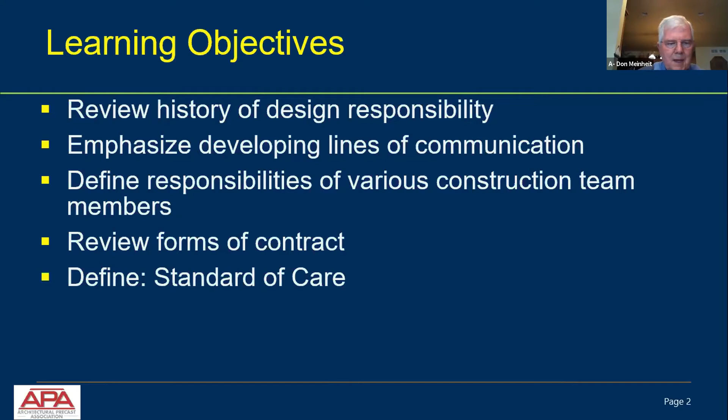Just briefly, here are some learning objectives for this discussion. The most important is the third bullet, where the ACI document defines the responsibilities of various parties in the construction of architectural precast concrete. Before getting to that bullet, I would like to also review and describe some history of the design responsibility requirements, emphasize that in every project, we need to develop lines of communication. We'll then get into the responsibilities of various construction team members and review forms of contract. And also in this presentation, I will define a standard of care.

This is a list of the ACI 533 members who were part of the group who voted and produced this particular document. The ACI 533 committee is called Precast Panels. It not only includes architectural precast, but also structural precast panels. The chair is David Wan of Oldcastle Precast. The secretary was Karen Polanco from Metromont. Karen is also now the existing chair. David has retired from the chair.

And there are several members that maybe you recognize names in this list. One might be George Beatty from Crescent Chemicals. Harry Chambers, unfortunately, is deceased, but he was a longtime member of ACI 533 and worked for TRW Nelson Stud Welding. Brian Miller has long been associated with precast concrete. I believe he started working for the National Precast Concrete Association, moved to the Precast/Prestressed Concrete Institute, and now works for GCP, a materials supplier.

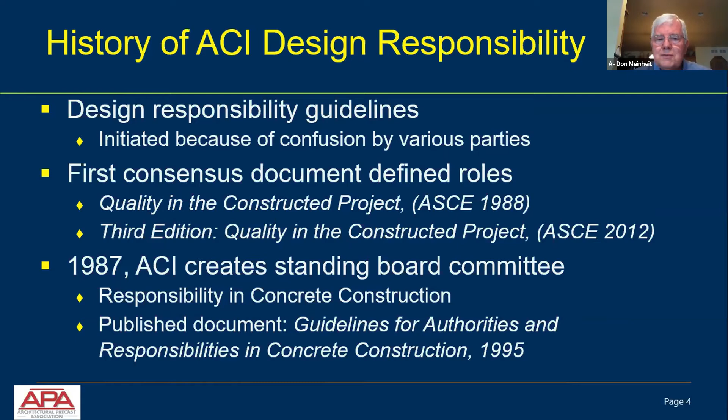They first published a document called Quality in the Constructed Project in 1988. That document is now in its third edition and was most recently revised in 2012. In 1987, ACI created a standing committee at the board level called Responsibility in Concrete Construction. And they first published some guidelines for authorities and responsibilities in concrete construction in 1995. And it was the action that ACI took that provided ACI 533 the initiative to produce a document.

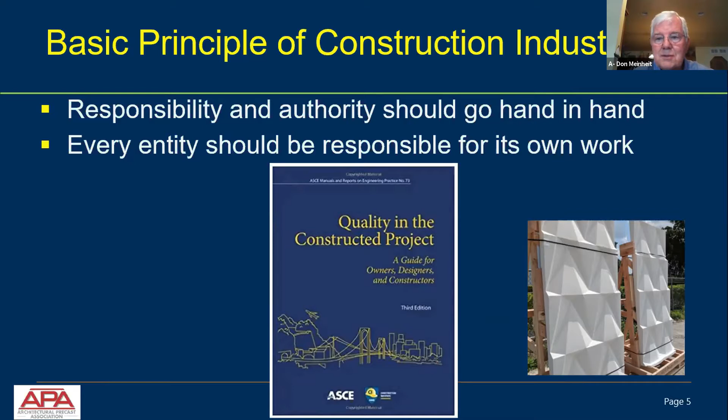And this whole issue of responsibility breaks down into two basic principles. The first principle is responsibility and authority should go hand in hand, and every entity in a construction project should be responsible for their own work. Kind of makes sense. In the middle of this is also the third edition of Quality in the Constructed Project produced by ASCE.

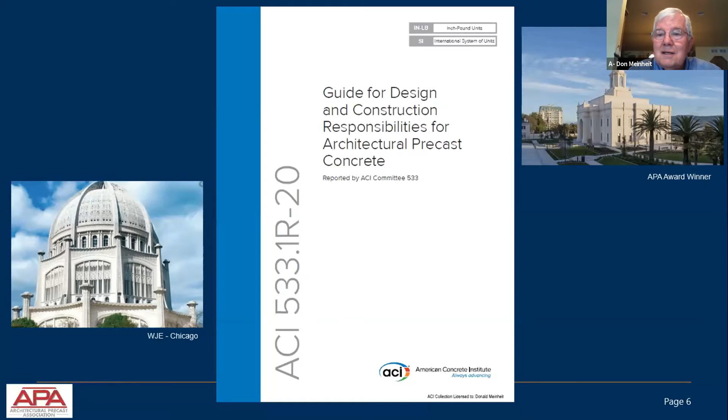This is also the cover sheet of the 533.1R-20, the guide for design and construction responsibilities of architectural precast concrete, published by the American Concrete Institute. And it is, as Tim said, sent to all of your certified APA plants. It's 11 pages long, and I've added two pictures. One on the left is kind of a historic, older precast concrete project. This is the Baha'i Temple here in the Chicago area. And the one on the upper right is a church in Chile, which is an APA award winner.

Now the ACI 533.1R, this design and construction responsibilities document, was first published in 2002. In this revision to the 2002 document, we have improved and added some additional information. The reason the 2002 document is no longer around is that ACI requires all of its committees to reapprove, update, or revise, or in some cases withdraw documents within an 8-year period.

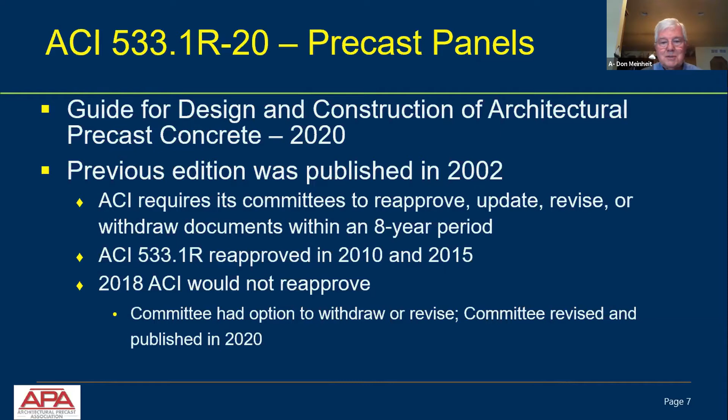ACI Committee 533 elected at the end of that 8-year period, which is 2010, to reapprove it. But ACI says you're not going to reapprove it forever, so you got 5 years of grace, and then you need to decide what you're going to do. So in 2018, we had another option, and that was that ACI said you got 3 years to revise this, or it comes off of the ACI's publication list. So we met that deadline, and so in 2020, we republished this document, and it is now available.

Now, I think everybody understands modern construction projects are very complex. And it is very logical to have input from all the parties of the project. And that's an absolute necessity. There's no one entity that knows everything about the construction. So inputs such as value engineering proposals, design alternatives, and performance requirements rather than prescriptive requirements are all good inputs for a construction project to make it acceptable to the owner who's paying the bills, as well as keeping the cost within the budget.

So let me play with this just a minute. Suppose we have an architect engineer saying that they require a contractor not to undertake certain tasks without the approval of the architect or engineer. And then suppose a problem develops from execution of those tasks, but the AE says they're not going to accept responsibility for those problems. Well, that's a conflict. That's a case of requiring compliance, but without accepting the responsibility.

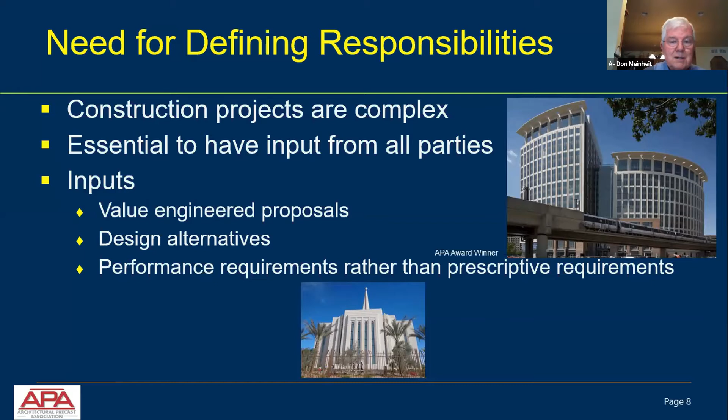Another scenario might be where owners have sued the architect and the engineers for approving poor quality construction, but at the same time didn't give the architect or the engineer a contract to monitor work progress. Here the owner is assigning responsibility without providing compensation for giving the architect and engineer any kind of inspection authority.

Project success seems obvious, but it's worth repeating. Clearly define the scope of the work. It starts with the architect, but it also needs to be clearly defined and understood by everybody in the project team such that the architect's concepts are manifested.

Also, clearly defined responsibilities are necessary, and those responsibilities are both in scope and in execution, such that we can achieve efficiency and cost. The project is cost effective. It is by all means safe to construct, and the structural engineer and other parties have designed the structure to be safe for the loadings, but during construction, it is also necessary that the work environment be safe, as well as producing a high quality product.

There are 5 basic chapters to this design and construction responsibility document. There's an introduction and scope. There's a section on definitions, which is new to the 2020 document. The 3rd chapter is called general responsibilities, and that's what we'll talk about more in detail, but that defines the responsibilities of the various parties in the construction project. Then there's some guidelines on hardware responsibilities, and lastly there's procurement and the bid process and how we go about getting the structure built.

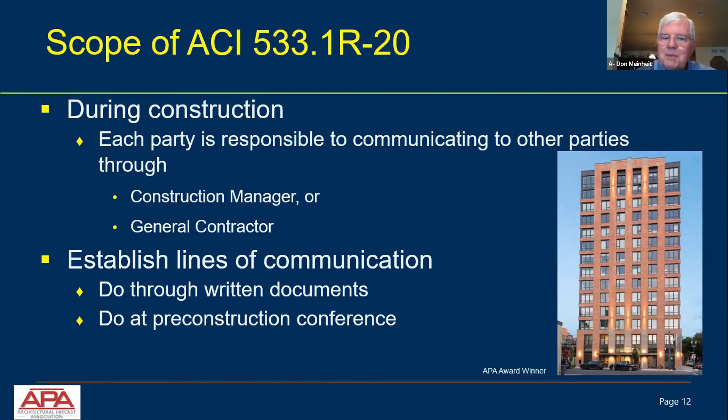During construction, each of these parties is responsible to communicate with the other parties. And that's usually through one of these two groups. It's either a construction manager or the general contractor. There is a necessity to have those lines of communication. And the CM or GC can do this either through written documents, or he can specify them during a pre-construction conference.

So in the design of precast concrete, more often than not, it is designed and reviewed after the precast work is under contract. It's not often that a precaster has to provide structural calculations and drawings that show how the precast fits on the structure prior to construction. It's usually done after the precast work is under contract.

However, if the architectural precast erection drawings are needed for the permit set, and that might be necessary depending upon how the project is submitted to the local building officials, that might require a seal of the precast specialty engineer prior to everything being under contract. So there may be some requirements for the architectural precast erection drawings being needed well before they are ever executed.

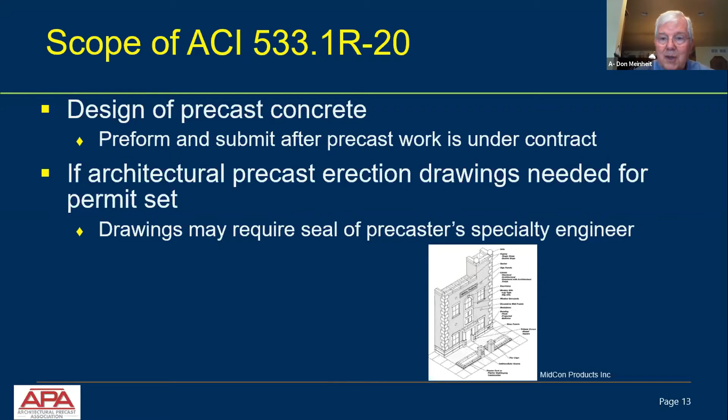Now, I said something about the standard of care. This is the definition that we got out of the ACI dictionary, and it's the one that we used. I'm sure that if you go to a lawyer, you'll get another one. I can recommend a colleague of mine at WJE who can give you an hour and 15 minutes on the standard of care. But fundamentally, this is the definition that we use.

It's the level of skill and competence ordinarily and contemporaneously demonstrated by professionals of the same discipline, practicing in the same locale and faced with the same or similar facts and circumstances. The long and short of that is, I, as a structural engineer, am oftentimes asked to review other structural documents and calculations and plans. The standard of care is, did the person do it with all of the correct load path? Did he do it with the correct load factors and things like that?

I may not have selected the exact construction that the other individual is suggesting, but if they can demonstrate to me that they can do a safe design, that to me represents a standard of care.

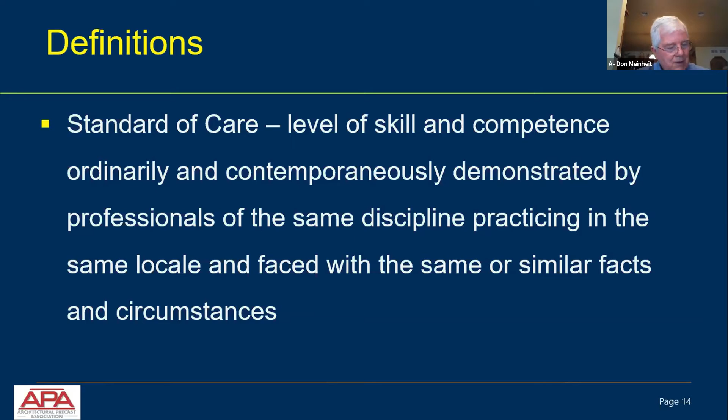Now, our first person who has responsibility is the owner, and the owner's project requirements and responsibilities include establishing overall goals. He has to also express an opinion on the type of building, whether it's concrete, steel, precast concrete, or even wood construction. He has to specify the intended use. What is the building supposed to be used for? Is it an office? Is it residential? Is it a warehouse? Is it supposed to be multifunctional? Is it supposed to be able to be converted from one use to another? That necessarily comes from the owner.

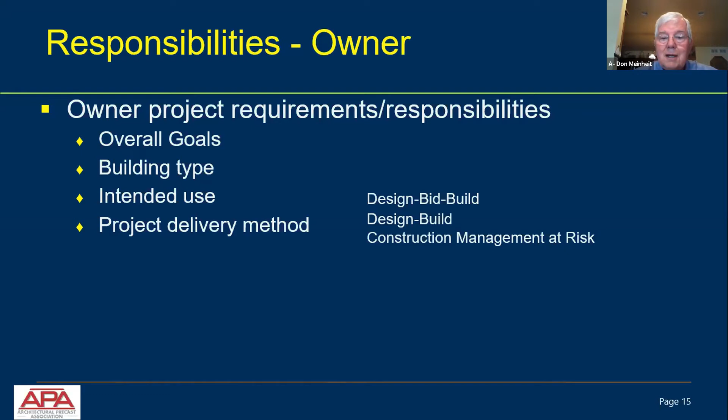There's also a project delivery method, and that is to some extent up to the owner. Certainly, there is the design-bid-build option, which is very typical of most construction. There's also a design-build option. And we can also do this with a construction management at risk or a construction management multi-prime approach. So the delivery approach needs to be defined early by the owner working with his team, more often the architect, and if the owner already has a desired builder, with the builder.

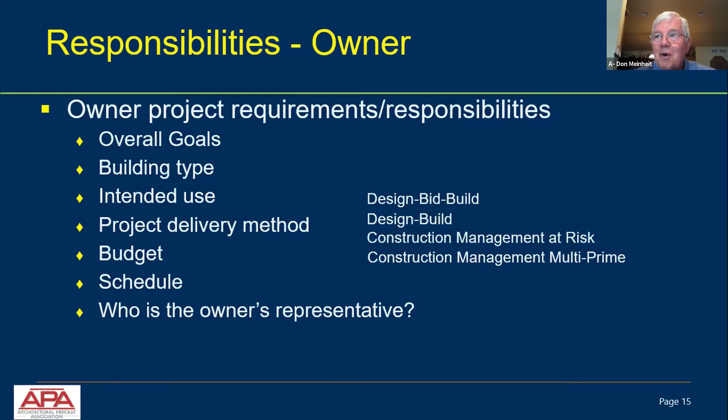So the architect has a lot of responsibilities, including those associated with the contract documents. Those contract documents develop the project concept. If the architect's drawings don't develop that concept, the rest of the team begins wandering around, wondering what they need to do. Those documents need to establish overall structural geometry, select the materials, appearance and function. They should specify tolerances and quality characteristics, and provide some details, not all the minute details, but what the joints might look like between elements.

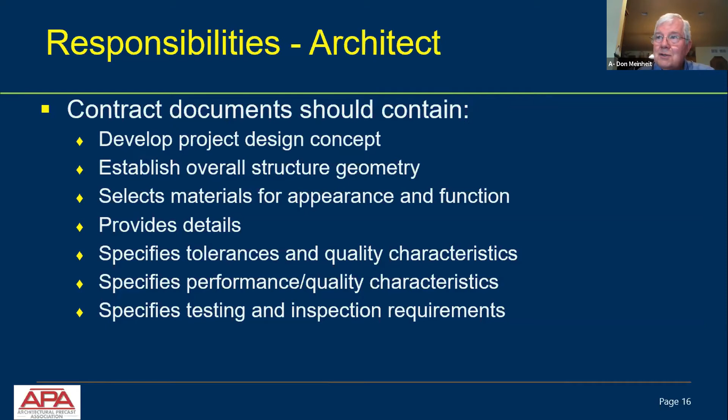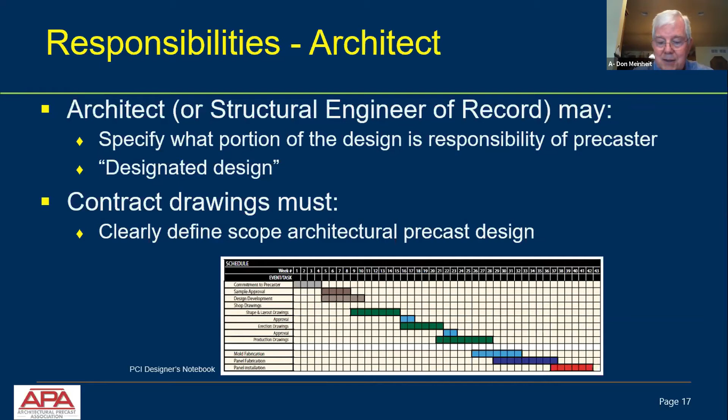Those architect documents should specify performance or quality characteristics, and should not neglect testing and inspection requirements. The architect or the structural engineer of record may be specifying what portion of the design is the responsibility of the precaster. The structural engineer of record usually designs the building frame, but is not necessarily involved with the detailing design of the architectural precast. That is called a designated design, and the precaster is responsible for it. Those contract drawings must define the scope of the architectural precast design before any precast design is undertaken.

Architectural drawings should show where the reveals are, primarily where the reveals are. However, it really should be the precaster's decision on panel size, because the precaster understands and knows how to handle, how to erect, and how to make the connections to the building.

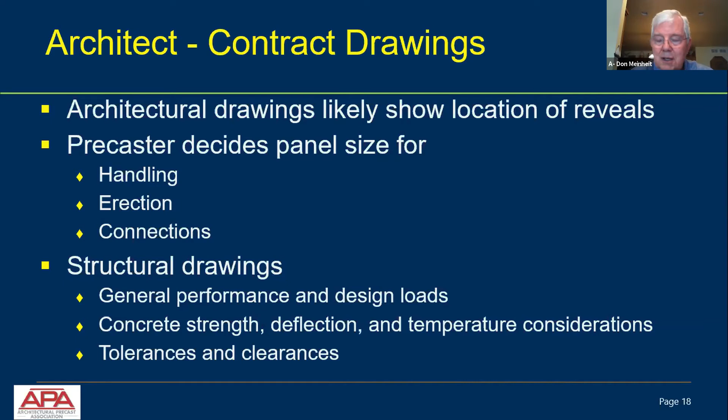The structural drawings should identify the general performance and also the design loads, and make sure that the structural drawings have the design loads for the precast panels that are being attached to them. They will usually define strength, deflections, and temperature considerations, and also either in the structural specifications or in the architectural specifications, the project manual, tolerances and clearances should be reviewed and identified.

So for a drawing summary, the architect should have both building location and site access shown on one of the cover sheets. It should show elevations, wall sections, dimensions. It should show basic details of joining and interfacing with windows, roofing, panel to panel sealing for air and moisture. And also locate the reveals.

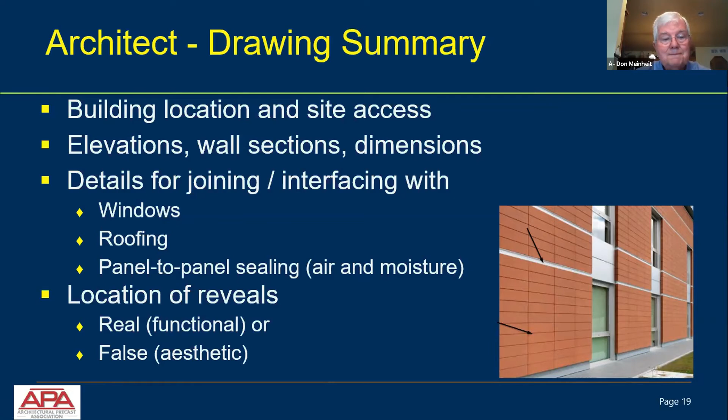In some cases, those reveals are real, like along this edge here. In some cases, they're false, like along these two lines in this architectural precast panel made to look like terracotta. The additional thing that must be shown on the drawings from the architect are what the required materials are and the color and finish. That's the architect's job, is to select those out of some kind of a palette.

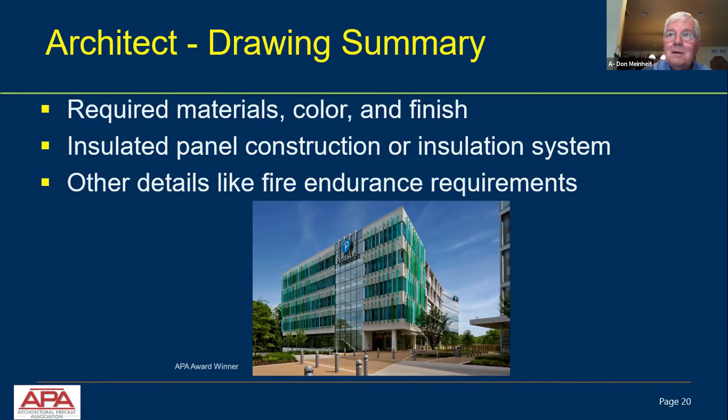Dimensional tolerances are, of course, a primary concern, and the recommendation from this committee from ACI is don't screw around with the industry recommendations. The industry recommendations, from my knowledge, are identified in PCI Manual 117. It's called the Manual for Quality Control for Plants and Production of Architectural Precast Concrete Products. There's also another document, the Tolerance Manual for Precast and Pre-Stressed Concrete Construction, MNL 135. MNL 135 is more attuned to structural precast as opposed to the 117 manual, which is architectural precast.

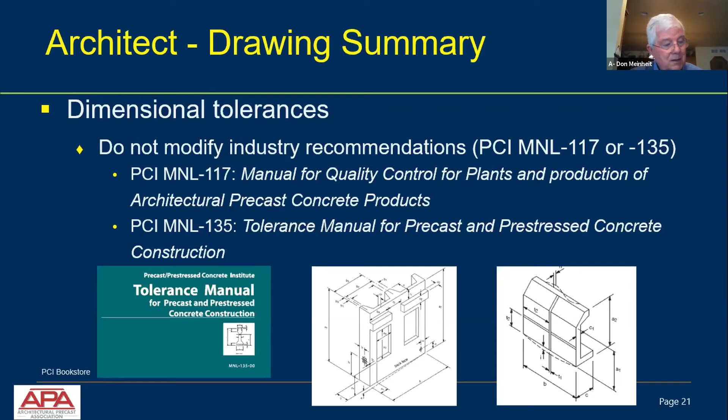And again, don't let anybody fool around with these tolerances. The industry knows what they can do, and these documents are available. I don't believe I saw any tolerance recommendations on the APA website, nor did I find one on the NPCA website. So my point of reference here is that PCI has a very good manual on tolerances.

When the architectural precast is finished, the architect and the structural engineer should be reviewing these shop drawings for conformance, and that's a conformance to the design criteria. Do they conform to what was on the architect's and the structural engineers' drawings? Did they meet the load requirements? Are the connection points reasonable and appropriate for loading the structure with this externally applied load?

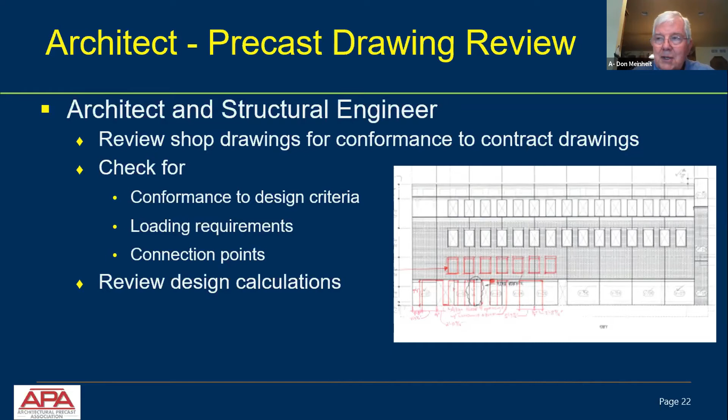In addition to that, the precaster is more often than not obligated to submit design calculations for the architectural precast for review by the structural engineer, and those calculations need to be approved really before the precaster begins his fabrication process.

The procedure that is found to be most successful is that there is a need to have an architectural mock-up sample. And approval typically requires an approval of a mock-up. The mock-up should really include things like the returns and the special features. Sometimes a full-scale mock-up is necessary, but without doubt, some color range and texture mock-ups are important for the precaster to make. And it usually produces at least 3 range samples.

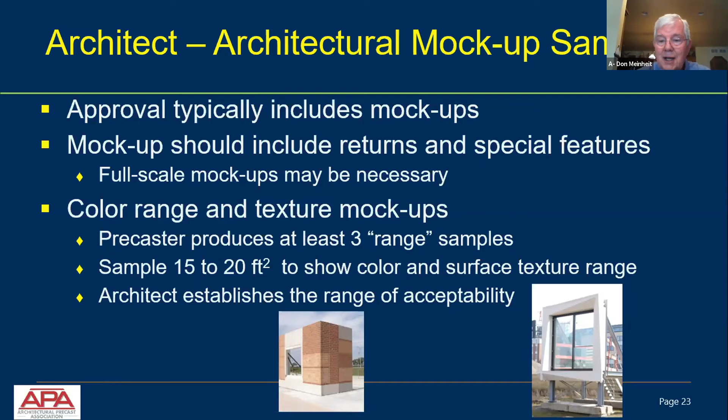In other words, these are ranges of the color as well as texture, and these samples are anywhere from 15 to 20 square feet, so it's like a 4x4 piece, so that they show both color and surface texture. And then the architect establishes what range of acceptability he's content with. And then the precaster has to meet those acceptable ranges.

The architect oftentimes has some detailed testing requirements, and this is particularly important when you need to evaluate the panel water tightness as well as the joint water tightness. Panel water tightness for concrete is pretty easy to do unless you have a whole bunch of cracks, but the joint water tightness is something that really needs to be tested, and a full-size mock-up is probably the best way to assure that we get water tightness.

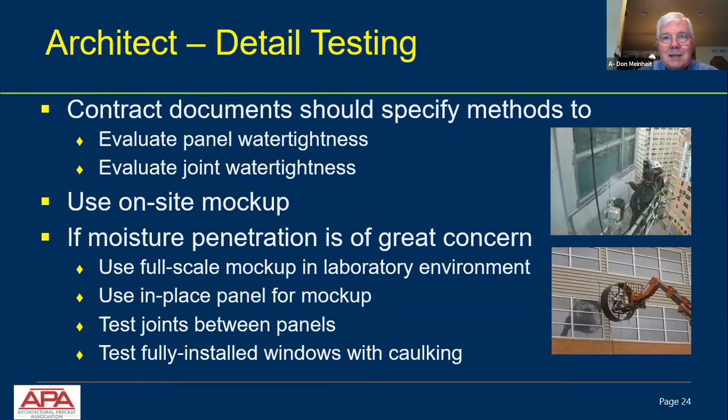You can either do that in a laboratory environment, or you can have an in-place panel on the building, and we use that for a mock-up to test the joints between panels as well as the junctions of windows and doors and things like that make penetrations with the architectural precast.

In terms of panel inspections, it's suggested that the structural engineer or architect create a checklist to verify conformance with those key items in the contract documents. And then it doesn't make any difference if you do the checklist unless you meet with all the parties involved to address the inspection concerns. And once you have those inspection concerns, the precaster must do some repairs as required to meet the architect's aesthetic requirements. That means that not only the panel, but the repair needs to fit in the color range and texture for the range samples.

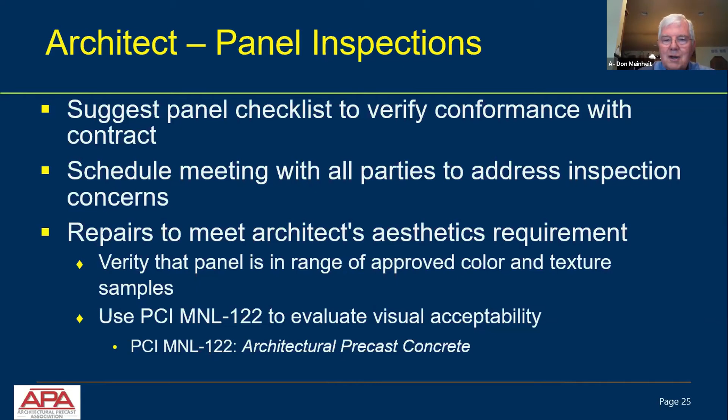And also there is another PCI document to evaluate visual acceptability. That's PCI Manual 122, Architectural Precast Concrete. And the basic rule of thumb there is if you look at it from 20 feet and find something, it's probably a requirement for some kind of repair.

The structural engineer of record is the person who needs to consider the weight of the precast on the structure he is designing. He certainly needs to be very cognizant of the fact that most of the stuff hangs off the side of a building, so it's eccentric to columns and eccentric to slabs. So there's oftentimes a torsion involved.

And the structural engineer also needs to be aware of what happens if I put all the precast on one side of the building and nothing is on the other side of the building. Does that rack the frame? Does that create a misalignment of the frame? What are the unbalanced loads that are acceptable to the structural engineer's frame?

On the structural drawings, the structural engineer should show where the panel gravity and lateral loads are to be connected. He doesn't have to necessarily put the precise locations, but the precaster needs to know about where the connections are to be added. And if the connections are not on the slab for a facade kind of panel, they have to go to the column someplace or another. And that's a decision that the structural engineer makes.

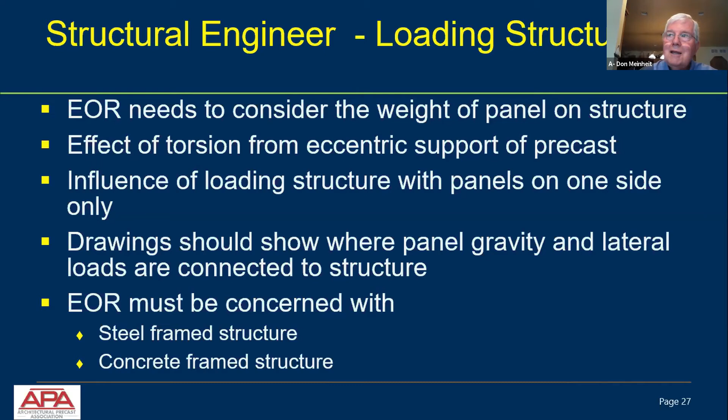And he also needs to be concerned with the type of framework. Is it a steel frame structure or is it a concrete frame structure? Because they have different requirements for making attachments. Steel frame structures are probably a little easier to make attachments to, whereas in concrete structures, you need to have some kind of embed or connection piece embedded in the concrete such that a connection can be made, and that means the contractor has to be involved.

The structural engineer also has to have a good knowledge of governing codes and deflections and temperature. He needs to delineate the lateral bracing for beams, and he should be making a statement about what the precast components are to be designed by the precaster, and who is responsible for the interfaces, the secondary bracing. Is it the precaster's responsibility, or is it the structural engineer of record's responsibility? There's also some details of required clearances and load transfer points for the structural engineer on his checklist.

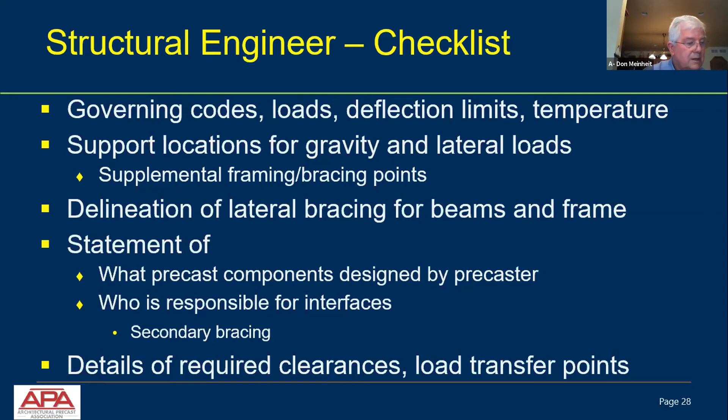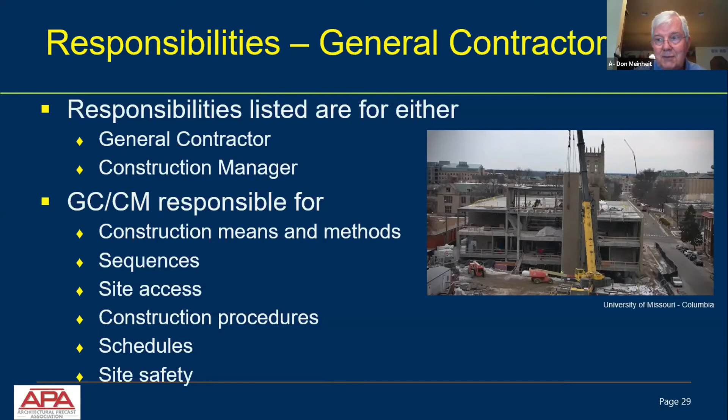The general contractor, his responsibilities are really not too extensive. It's either a GC or a CM. Those GC or CM responsibilities include construction means and methods, the sequence of construction, site access, construction procedures, schedules, and last but not least is site safety. The site safety is the responsibility of the construction manager or the general contractor.

In a reinforced concrete structure, the GC or CM is responsible for placing the embed items. He should also be providing some kind of as-built survey for the embed items to verify that they're consistent with where the precaster wants to make his connections.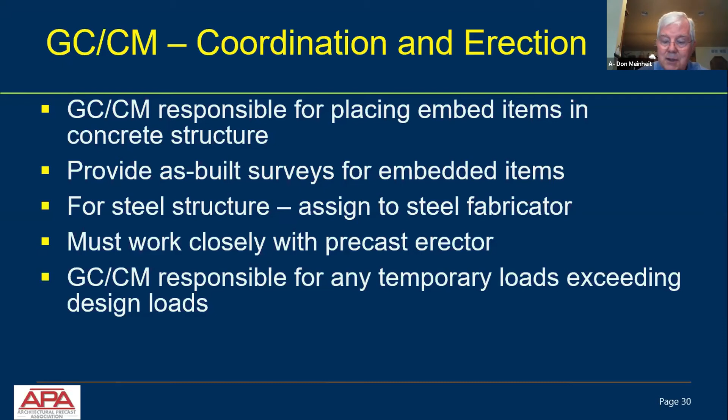For a steel structure, that's usually assigned to the steel fabricator, and then the precaster needs to work closely with the steel fabricator, contractor, or the precast erector in order to make sure that the connections are in the right place. If any of those loads or those temporary loads exceed design loads, they need to be brought to the attention of the structural engineer, and the structural engineer needs to make a suggestion as to their acceptability.

Now we'll finally get around to what the precaster's responsibilities are, and he's usually a subcontractor to the GC or CM, and the precaster is responsible for preparation of those component elements and design and fabrication of those components. He prepares precast shop drawings, designs and details the connections between the architectural precast component and the structure.

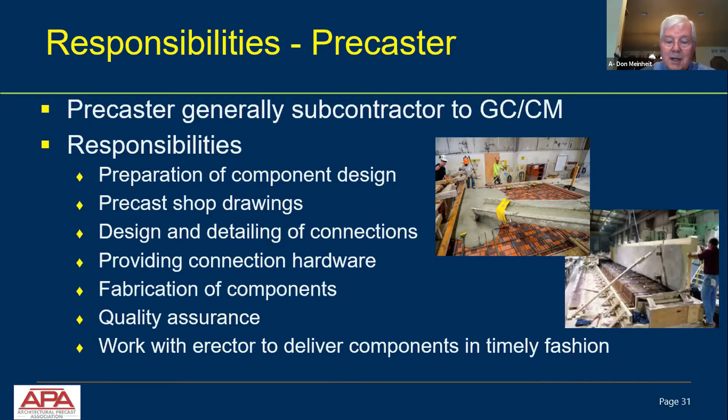Usually he provides the connection hardware, and he then proceeds to fabricate the component in accordance with what the acceptable color and texture is. He's also responsible for quality assurance for the concrete, for the texture and for the color. And then he has to work closely with the erector to make sure that the products are delivered in a timely fashion. The first step that the precaster needs to do is to determine panelization.

I don't think it's appropriate for an architect to make those final decisions. I recently had an experience where the architect was trying to figure out, do I want to make upside down E's, or do I want to make W's? Do I want to make punched openings? And where do I want to put all the joints?

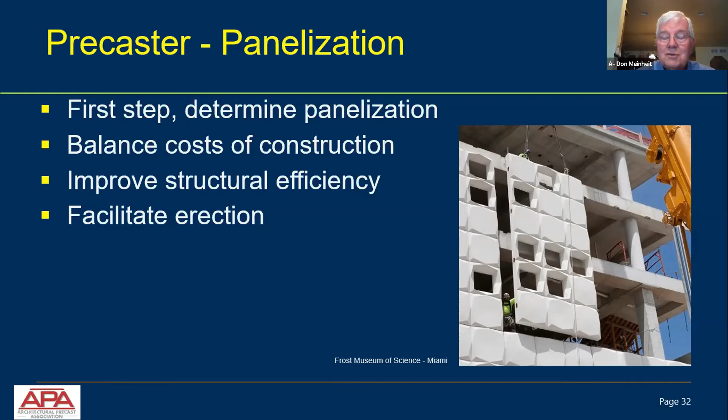And my comment was, why don't you let the precaster figure this out, because he knows where it's most efficient and easiest to make the connections. And he also knows something about where the structural engineer of record can put all of his connection hardware. So the first step is to determine panelization, and you have to balance the cost of panelization to construction, as oftentimes you can improve efficiency with a certain panel size, and certainly facilitate the erection of the precast on the frame.

Drawings for the precaster are to provide detailed calculations. Those detailed calculations are reviewed by the engineer of record. The precaster's drawings should show the shape and the erection drawings, and those drawings should be sealed by a professional in the state where the project is sited.

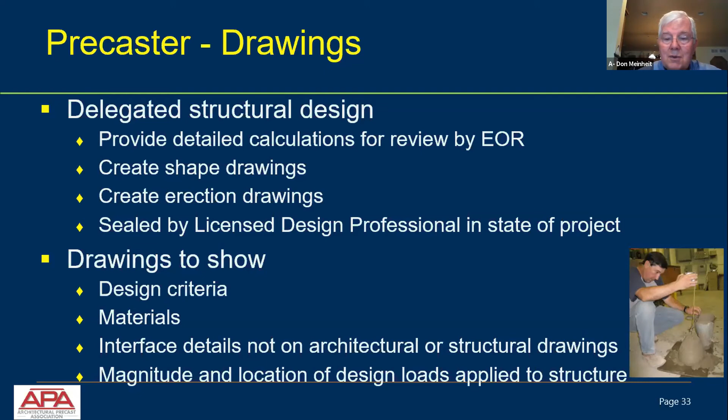Precast drawings should show design criteria, the materials, the interface details that are not on any of the structural or the architectural drawings, and any magnitude and location of design loads applied to the structure, so that the structural engineer of record can have a basis for evaluating the effects of the precast on the structural framework.

Design for the precast, there really are 3 design responsibility options that are listed in the 533.1R document. They are summarized in extensive detail in table 3.5.3. And basically, this is an overview of that. The first option is where the architect has a strong background. If the architect has a very strong background in architectural precast, he may want to do all of the design documents.

Option 2 is the more common approach, and that is where the owner and the architect assign and designate the responsibilities of the precast design to the precaster. This more often than not accelerates permitting. And there is a third option called a hybrid design, and that's where the design responsibility is split between the architect and the precaster.

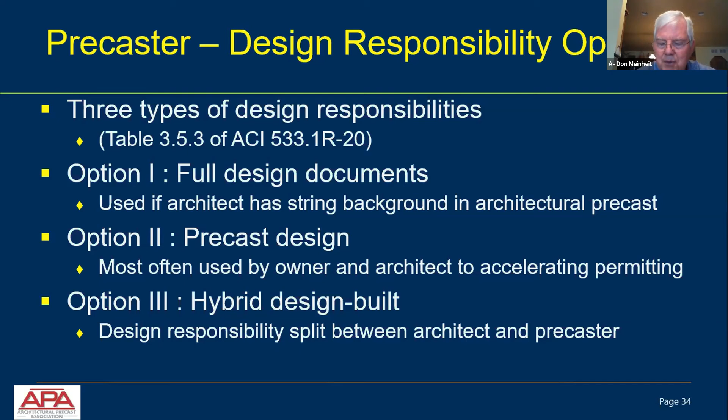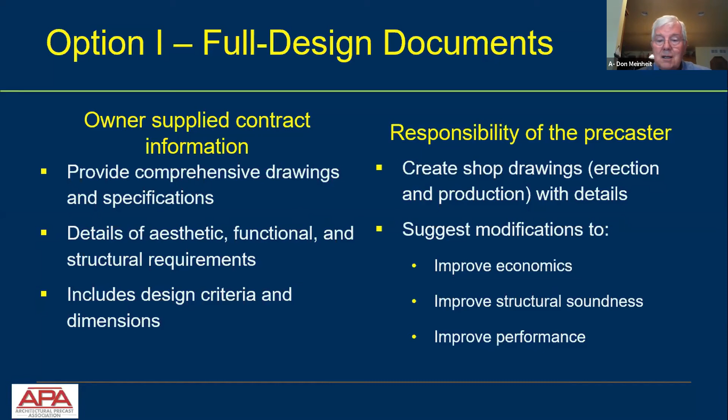And in the next 3 slides, I have those design responsibilities outlined as they are in the 533.1 guide. On the left-hand column is what the owner is to supply, and on the right-hand side is the responsibility of the precaster. I'm going to go through the precaster responsibility here for option 1, where the architect has a pretty strong background in precast concrete. The precaster creates the shop drawings for erection and production. He suggests modifications to improve economics, to improve structural soundness, and improve performance.

For option 2, and I said that's the more typical approach, the precaster's responsibilities are to submit the erection and shape drawings for approval, and assume the responsibility for the component structural design. That means that the precaster takes the responsibility for the design of the precast component, but no responsibility for the component's effect on the building. That's the structural engineer of record's responsibility. And then he has to stamp the drawings or hire a specialty engineer.

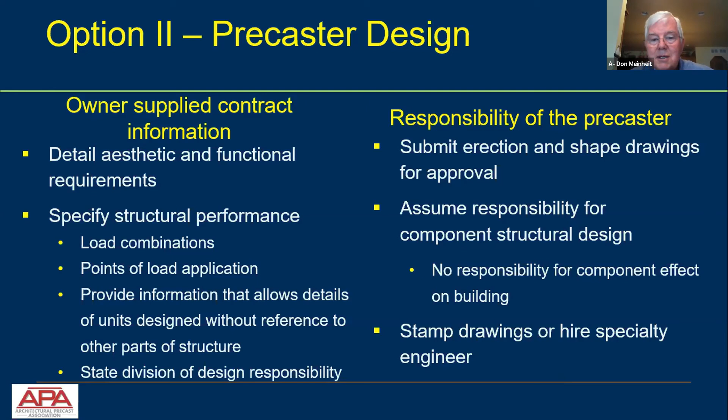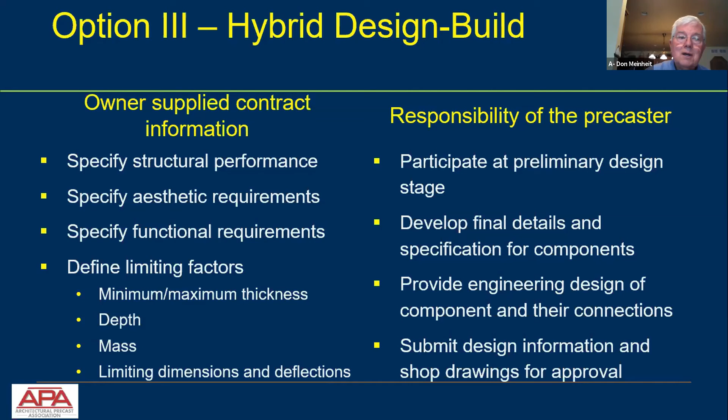And the third is kind of a hybrid, where the precaster's responsibilities start at the very preliminary design stage. He helps develop the final details and specifications for the component. Then he provides the engineering design for the components and submits the design information for approval by the architect and owner. The specialty engineer, that is the person who is hired by the precaster, is a licensed structural engineer. He specializes in designing precast and pre-stressed concrete.

He's actually responsible for all the structural design of the components, the connections, the lifting, handling, and structural aspects of erection. How you pick and how you roll and how you manipulate a precast panel once it gets to the site is his responsibility.

He is not under contract for anything that the engineer of record, the structural engineer of record, is responsible for, unless the specialty engineer is actually assigned that responsibility. And he certainly must coordinate with the engineer of record when the specialty engineer takes exceptions to specific criteria or reference standards. And I can give you a quick story about things that are happening within ACI.

There are many exceptions to ACI 318 that the precast structural design industry takes. The precast industry is now writing its own design standard. It has a title ACI 319 as opposed to ACI 318. ACI 318 has sections in it that deal with precast concrete. Eventually those sections are going to come out and there'll be a precast code, ACI 319.

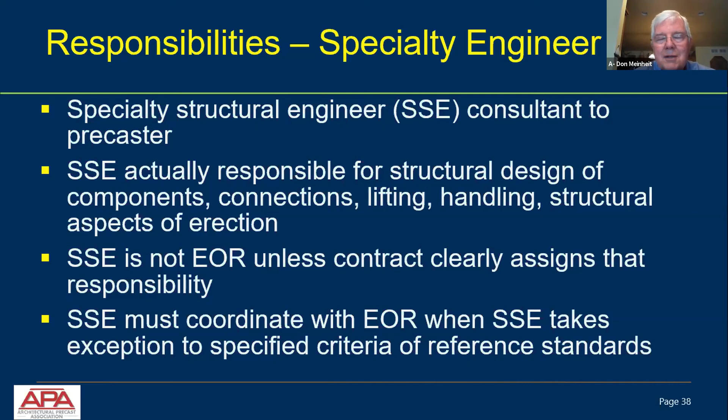And there's also a move to create a design code for post-tensioned concrete construction. So things are moving toward a code for designing precast concrete. And there are many exceptions that the precasters take with respect to things that are in the ACI code. And hence this is a good step.

The erector, of course, is usually a part of the precaster's contract. Precasters oftentimes perform the erection with their own erection crews, although there are precast erection contractors who specialize in this, who are available and are not necessarily employed by the precaster.

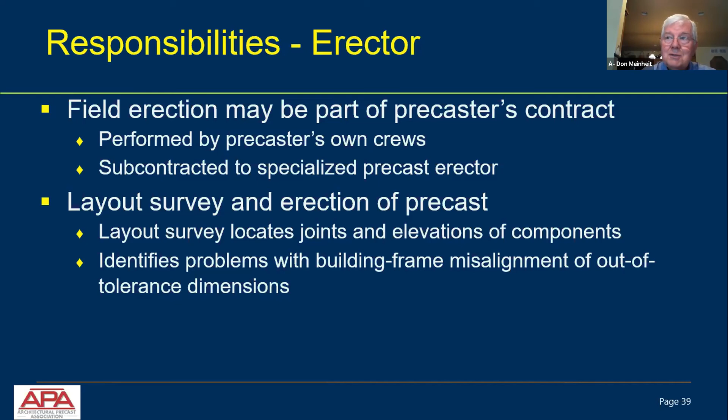The erector should be laying out the structure prior to any kind of erection of precast. He should be locating the joints and all the elevations of components to find out if there are any conflicts. And if he identifies problems or misalignments or out of tolerance issues, it needs to be addressed ASAP.

There is an installation quality assurance manual for precast erection from PCI. It's manual 127, Erector's Manual: Standards and Guidelines for the Erection of Precast Concrete Products. And as APA has, there is a certification program. So PCI actually has a certification program for precast erectors.

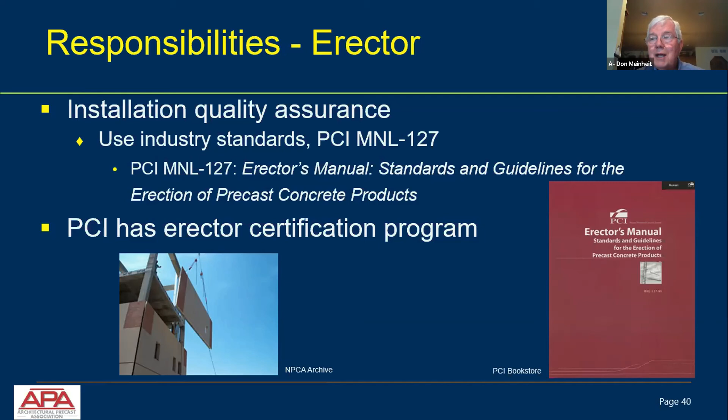Hardware, oftentimes we scratch our head and figure out who's responsible for this. And I can't give you a straight answer. It depends upon whether it's a cast-in-place concrete structure, a precast structure, or a structural steel structure. There's no standard answer to this question of who has the responsibility of providing all the hardware. The bidding and contract documents should really clearly show who furnishes and places all this field hardware.

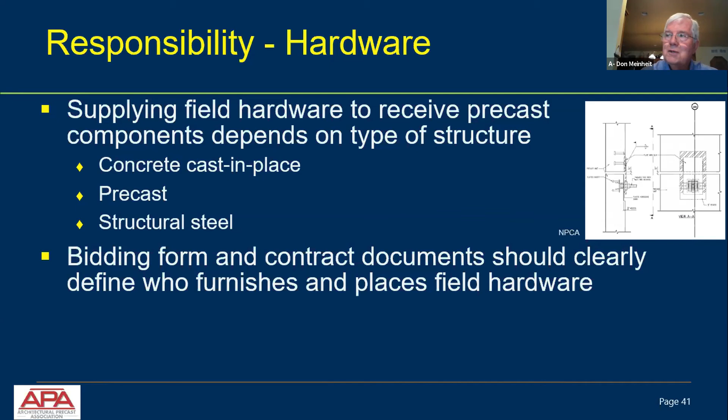Oftentimes a precaster has to install other accessories and hardware into the architectural precast, maybe not on the outside of the panel, but on the inside. So if there are electrical boxes, conduit, window inserts, or fastenings for other trades. Or if it's a parapet panel up at the roof, you provide a reglet for terminating a roofing membrane. Those items have to be provided to the precaster prior to fabrication.

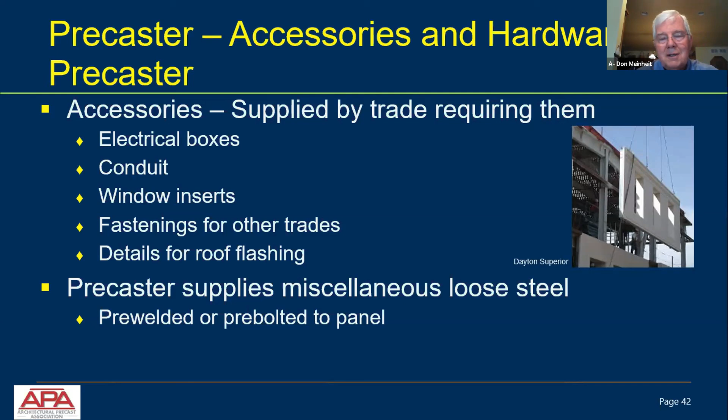In general, the precaster provides the miscellaneous loose steel, either pre-welded or pre-bolted to the panel, so that the erector can do the erection and not let the panel hang on the side of a building for a day before things are attached.

Procurement and bidding process. This is the last part of ACI 533.1R, and it provides a timeline. So what it does is it provides a checklist and a system of things that should be done in step one. And the first step is verification of the architect's concepts and systems.

Second step is at the pre-bid conference, make sure you understand all the architect's concepts and wishes, and then fully understand your responsibilities. And then at the post-bid scope review, repeat those responsibilities and discuss timelines and schedules and things like that.

And at any pre-construction step 4, you need to provide a path of communication between you and the other parties in this project. That is the end of my discussion.

I think I have a few extra minutes. Again, this document is available. It was published in May of this year. I think the actual publication date was May 4th. It's available through ACI in their bookstore. If you're an ACI member, it's $34, and if you're a non-member, it's $54. But it's an 11-page document.

It's a revision of an initial document that was created in 2002, and it's an important document because it really does help define responsibilities, and responsibilities prior to 2002 were not very clearly defined and caused a lot of confusion.